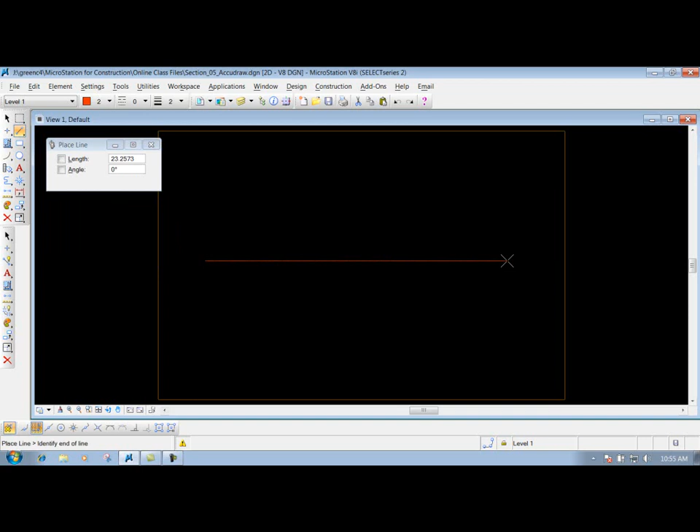Let's say I need to draw a horizontal line, maybe over 15 foot. If I don't have Accudraw on, let's say I close it, and I come in here and left click to start my line, I could draw it over and probably get it close, but it may not be perfectly horizontal or vertical depending on how I want to draw it.

So that's where Accudraw comes in. I'll make sure my Accudraw is loaded. I'm going to change my attributes here to white, that way you can see the line. Now I come in here and left click to start my line, and you'll see my compass around it.

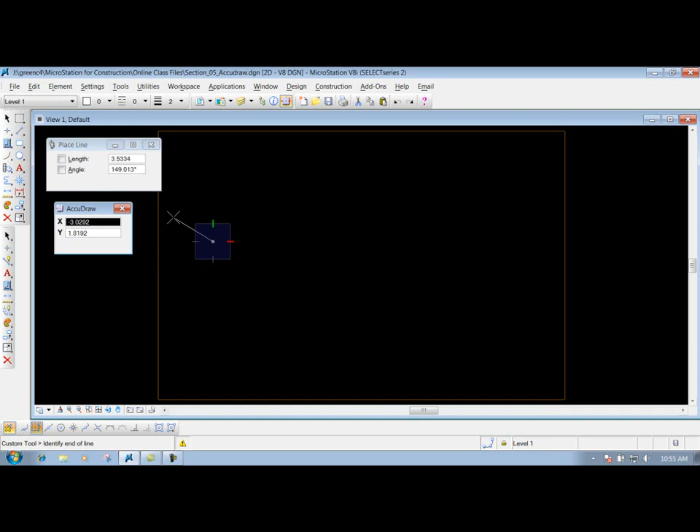I'm going to demonstrate the majority of this in XY mode for right now; we'll go to polar mode later on. Let's say I need to draw a horizontal line over 10 foot. All I need to do is pull it in the direction that I want to go, let's say to the right, and type in the value I want, let's say 10 foot. I type in 10.

Now if I move my mouse up and down, you'll notice it's locked to that unit I just put in as I move it. If I want a horizontal line 10 foot over and don't want to go in the Y direction, I just need to make sure it's locked, and you'll see it jump a little bit. You'll have a little leeway to move your mouse up and down, but if you go too far, it'll want to go up or down, and you'll see it jump or lock into your X axis. If that's what you want, left click to drop it off, and we're finished.

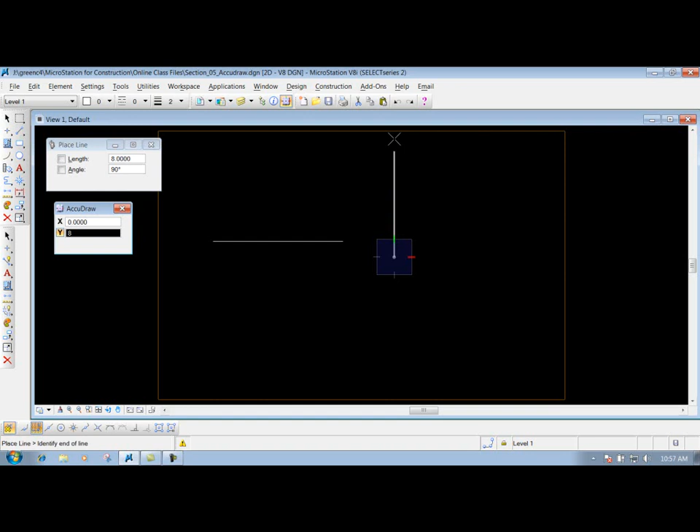We can right click to reset the tool if we're done, or do the same thing for the Y mode. Let's say I need to go up 8 foot. Left click to start the line, pull it up in the direction I want to go. You don't have to get into this box here—all you have to do is pull it in the direction you want, and it automatically knows inside the Accudraw box where to place it. So as I'm moving up, I need to go up 8 foot. I type in 8, left click to drop it off, and I'm finished.

Simple as that. Also, if you need to go left or down, which puts in a negative value, you don't necessarily have to type that negative value, because it knows what direction you want to go from the last data point you selected. So if I want to go left instead of right, and draw a horizontal line 12 foot, just pull it in the direction you want, type in the value, left click to drop it off, and you're finished. Using XY mode, there's no need to get into this box and type in the value, because it knows the direction you want to go from your last data point.

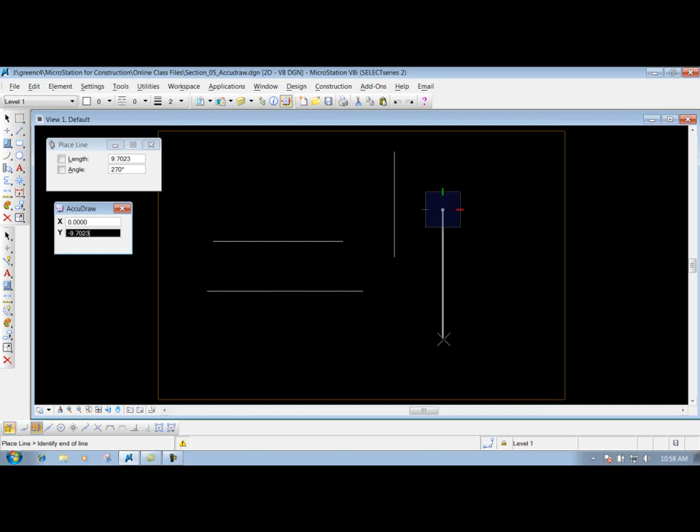Or you can also come in here—let's say I need to go over 10 foot and 5 foot down. We can do that also. We left click to start our line.

We'll start at this endpoint right here using the key point snap. I'll snap to it and pull it over in the direction that I want to go. Let's say it's 10 foot over. I'll type in 10, and hit the tab key on your keyboard to lock in that value.

Now as I move my cursor up and down, it's just going to go in the Y direction. So if I want to go down a certain value, all I need to do is pull it in the direction that I want to go. Type in 5 — we'll say it needs to go 5 foot down. I'll type in 5, left click to drop it off, and we're finished.

Another thing in your Accudraw box that we're going to demonstrate in this video is your smart lock. So let's say we're drawing a line over in this direction to the right. Let's say we want to stop it at this vertical line right here, but we want to keep our line horizontal. Right now, I started my line, and if I go up here, of course I'm going to have a diagonal line.

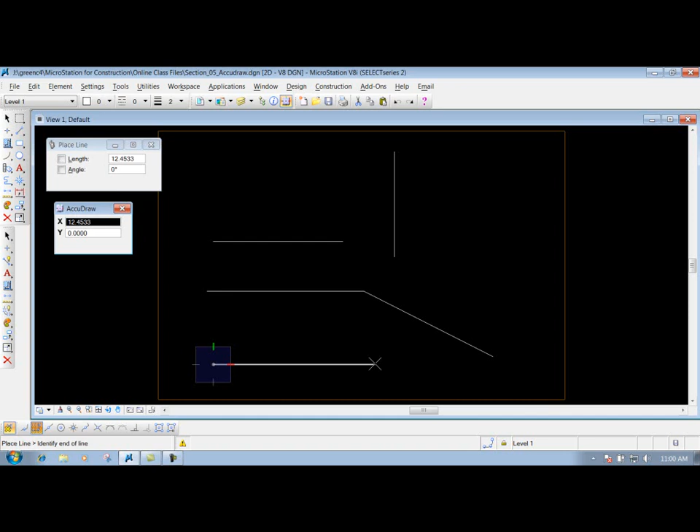What you can do, if you want to keep it locked in a certain value — maybe your X value or your Y value — is pull it over in your X value, if that's the direction you want to go, and then hit the enter key on your keyboard. What it will do is lock out your other value, which is the Y value. So as I move my mouse up and down now, you'll see my line is not going up or down — it's still going in my X direction to the next point I want to go to.

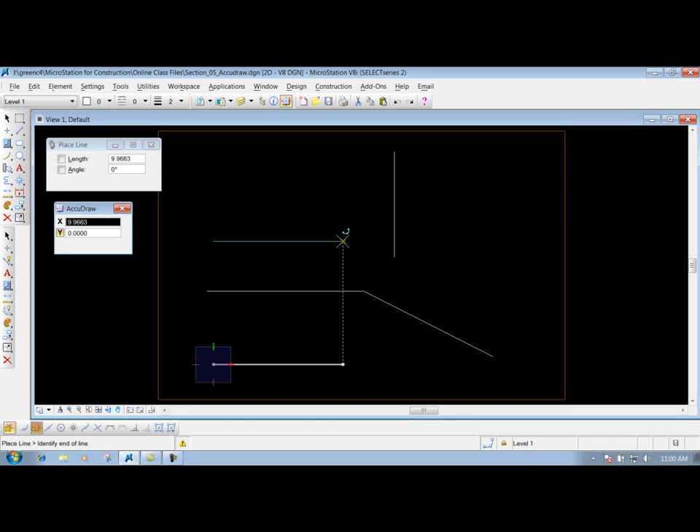So if I wanted to stop it at a certain point, maybe this one, I could snap to it and drop it off. Or maybe this point right here — let's say I want this horizontal line to stop at this endpoint. All I need to do is snap to it, left click to drop it off, and we're finished. That's what the smart lock does by hitting the enter key on your keyboard.

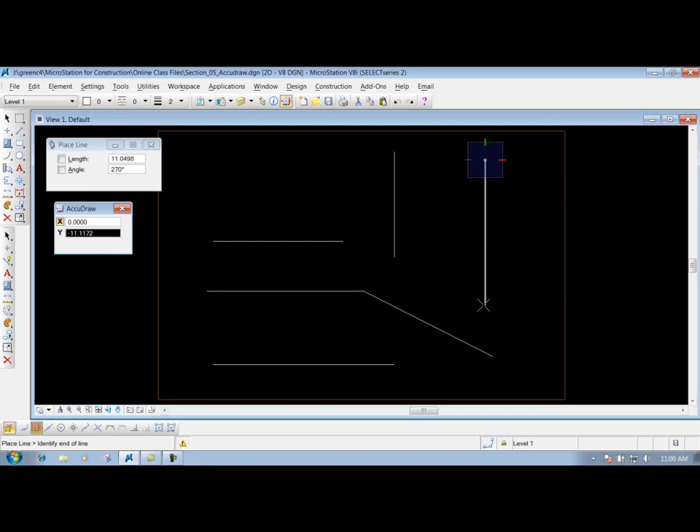It locks it to just go in that value, just like what I did here — I locked it whenever I went down, so it's just going to go in the Y direction, not in your X direction whatsoever. That's what the smart lock allows you to do.

Now we showed you a few things with your XY mode. Just keep in mind you don't have to stay in this box using your XY mode. If we switch it over to polar mode — make sure your Accudraw is highlighted, hit the space bar on your keyboard — it changes over to the polar mode. This top one is the distance, this bottom one is the angle.

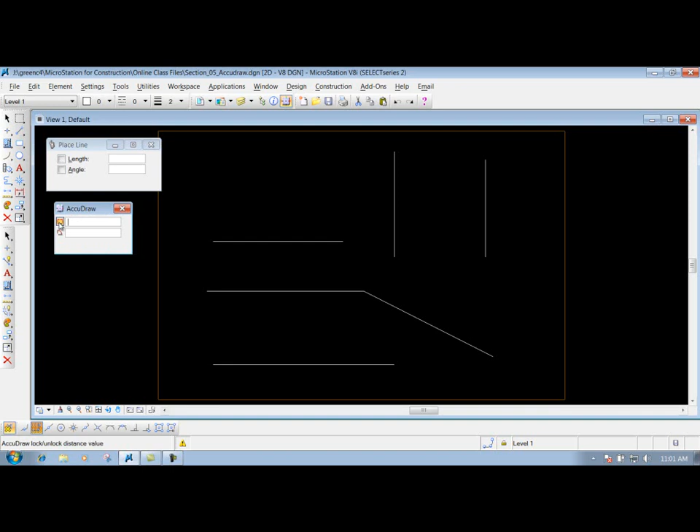So now let's come in here and delete these items, go back to my place line tool, and make sure my AccuDraw dialog box is highlighted. Now I come in here and left click to start my line. You'll notice my compass now, instead of being a square, is a circle — that indicates I'm in the polar mode.

Using the polar mode, you do need to make sure it's flashing in the box that you're wanting to put that value in. Right now it's flashing in my distance. Let's say I need to go over 12 foot — I type in 12, hit tab to lock it in, and then now I can put in my angle, let's say 30 degrees. I type in 30, and then all I have to do is left click to drop it off.

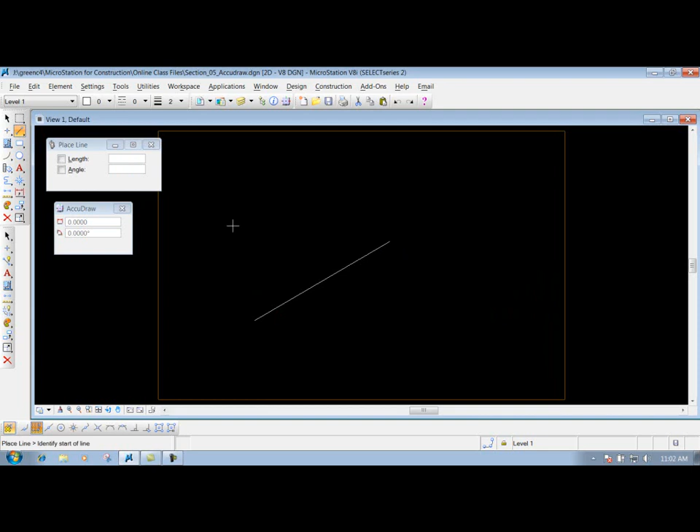Now I have my line placed out there. Now if I come back in here and I draw another line, left click to start it, you'll notice now it's flashing inside my angle and not my distance. So just keep in mind whenever you're using the polar mode, look and see where it's flashing before you put in the value.

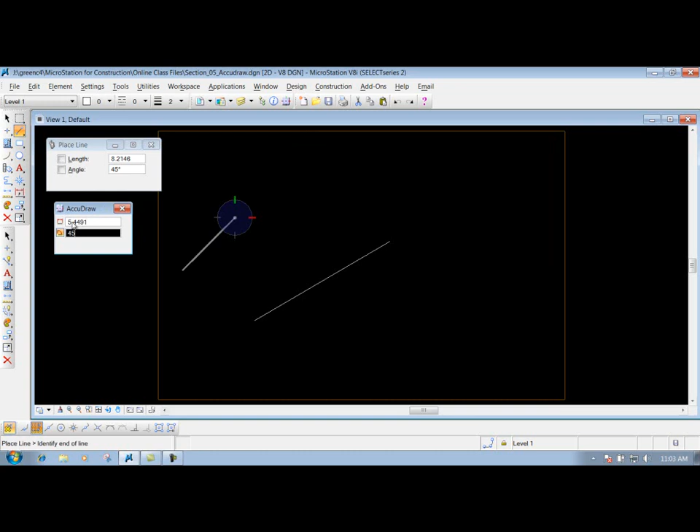Because right now it's flashing in my angle, so if I just want to put in an angle, I could do that. I could type in 45 degrees, and I can go to whatever point that I need to go to. If I'm just arbitrarily placing it out there, I can left click to drop it off. Or if there's a distance value that I need to put in here too, of course I just click on my tab key to lock that in. Then now I can type in the value that I need, or I can just arbitrarily place that line out there.

But like I said, whenever you're using AccuDraw in the polar mode, just make sure it's flashing in the correct box before you type in the number that you need. So just keep that in mind. Now we demonstrated a lot of the AccuDraw options where we're drawing a perfectly horizontal line or perfectly vertical line, or using the polar mode, using the place line tool. You can use AccuDraw with a lot of other tools inside here too. And like I said, AccuDraw is always used in combination with another tool.

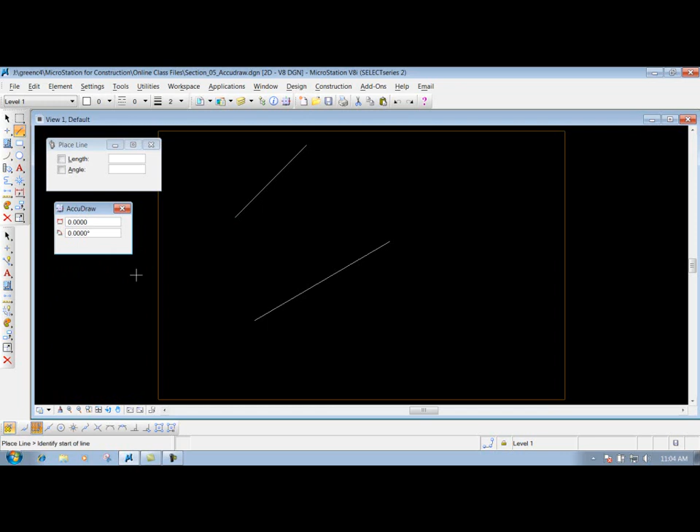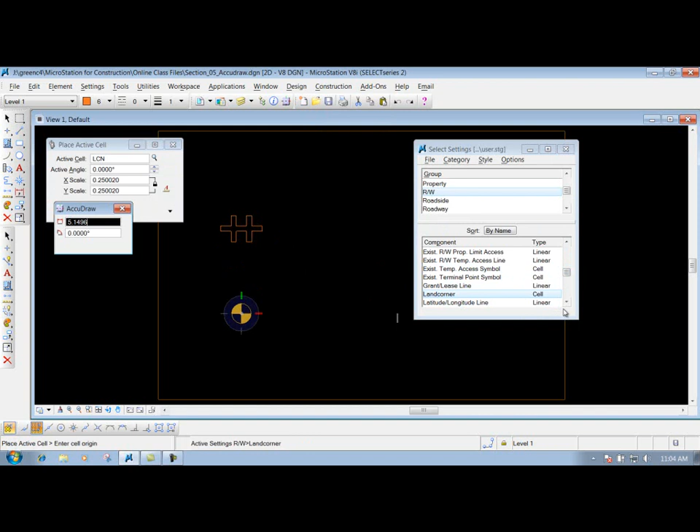So let's say I come out here, and I'm going to delete these two, and I have a design. I go down to my design pull down, and I'm just going to place some cells out here. See if I can find a couple here. That'll work for this example. I'm going to close this down. I have my AccuDraw box still open. I'm going to click on the space bar to bring it back to my XY mode.

Let's say I need to copy this cell to another point, or maybe I need to move it or copy it so many units over or so many units down, or just perfectly horizontal. We can do that. Let's say I need to move it. So I'll go to my move tool, select where I want to move it from, and now as long as I have my AccuDraw box open and highlighted, I can move it over and define the distance that I want to move it. If I'm just arbitrarily placing it, I move it to wherever I need to go.

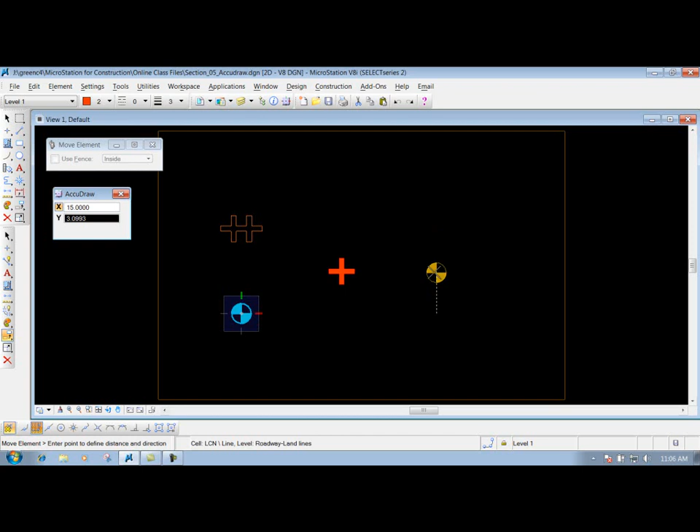Or let's say I need to move it 15 foot over and 2 foot up. Pull it in the X direction, type in 15, tab to lock it in. Now I'll move it up. So I need to move it up 2 foot. Type in 2. Left click, drop it off, and we're finished.

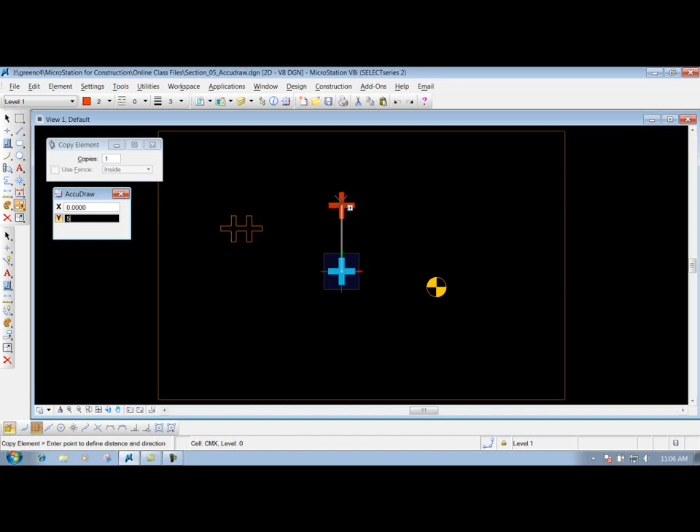Or let's say I need to copy something. So I need to copy this cell right here. Copy. I'll left click to identify where I want to copy it from. Maybe I just want to copy it 5 units up in my Y direction. So all I need to do is pull it up in my Y direction, type in 5, and make sure you don't move too far from your Y value, that way it's still locked in. Left click to drop it off, and we're finished. And then I can do it again if I wanted to.

So like I said, you can use AccuDraw in combination with many of your tools to enhance your production in your plan drawings or your bridge drawings or whatever drawings you're working with.